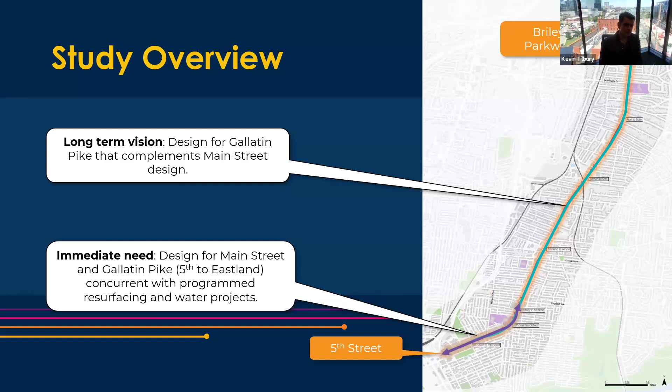On top of that, there's a long-term vision we're developing for the corridor, so that what gets designed on Main Street will be consistent for the entire corridor. So it's really two projects in one. The whole purpose is to set a long-term vision, so that projects done this year, next year, and in the year ahead are all consistent with this vision for what we call a complete street. That means intentionally providing safe and accessible options for all users, while being implemented in a cost-effective way, making good use of our resources. That's the vision we've set out to achieve.

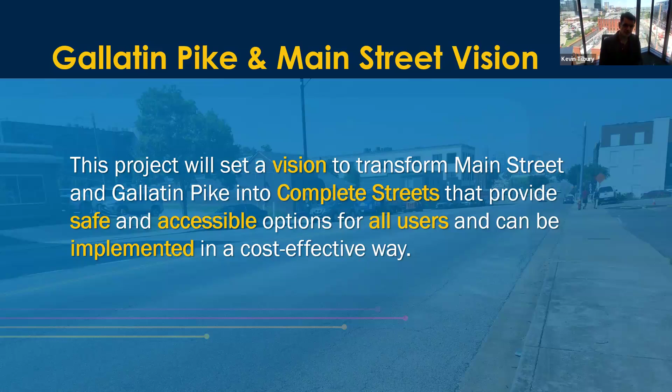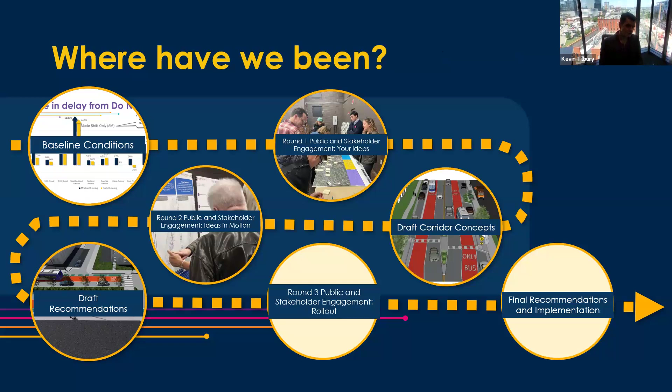We've been on a journey. Some of you have probably attended meetings in the past, and the good news is we're nearing the end. We've already had two rounds of public engagement and we're now in our third round. We'll talk more about that, and where we're going from here. Some of you are very familiar with the corridor since you've been here throughout the process; for others, this might be your first meeting. So we thought it would be helpful to bring everyone up to speed and remind you why we're doing this project.

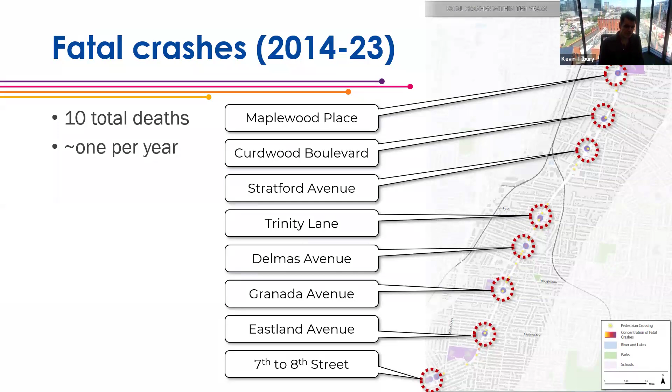Let's look at some of the data we've uncovered, which we shared at the first meeting. There is an existing and real safety need along the corridor. This shows the number of fatalities over the last 10 years through the end of 2023. What's remarkable is that since we created this map for our meetings in December, there have been two more fatalities on the corridor. So it's irrefutable that there's a safety condition here. We also have crash data, but picked this map because it really stands out.

Part of the reason we're seeing such a prevalent safety issue on the corridor is that there's not really a good place to cross the street. You can see on the map that there are stretches of Gallatin Pike and Main Street where you could go as much as half a mile before finding a safe, marked crossing opportunity. When you see a condition like that, of course you're going to have a safety issue.

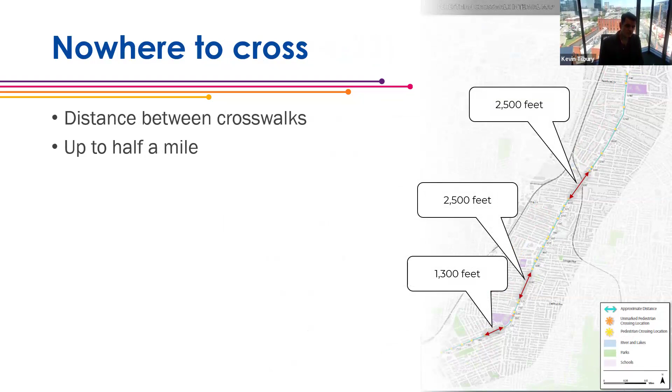There's an organization called Smart Growth America, and through their National Complete Streets Coalition, they compile safety statistics on places in America and rank them. The ranking just came out about two weeks ago, and Nashville lands 36 out of a little over 100 metropolitan areas in the United States. So we're not the worst, but we're also not the best—we're somewhere in the worst third for fatalities.

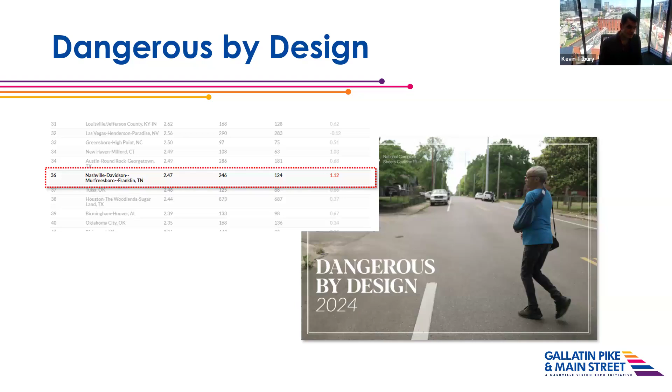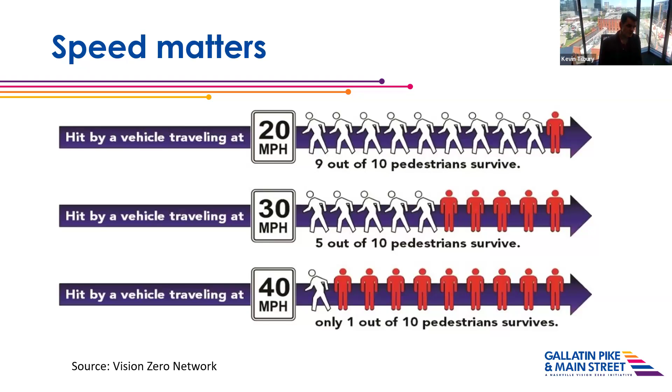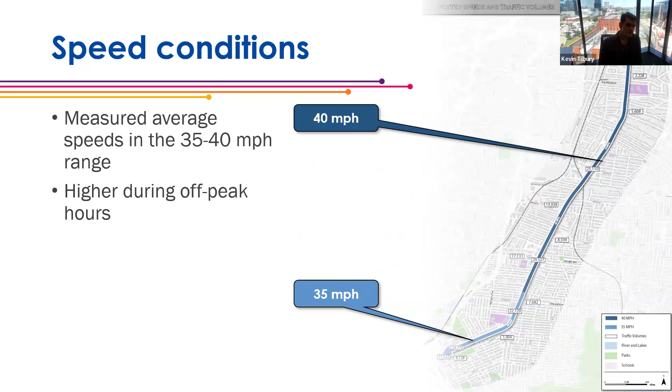This is part of an intentional effort to redesign our streets so they are safer for people. Another reason we're seeing this safety condition is speed. The magic number is 30 miles per hour—once cars travel above that, a collision with a pedestrian turns from an injury into a fatality. So we're designing the street so motor vehicles move at 30 miles an hour or less. That's in contrast to what we see on the corridor today, where measured speeds are 35, 40, and some off-peak speeds even higher, which is another major reason we see the safety condition we do.

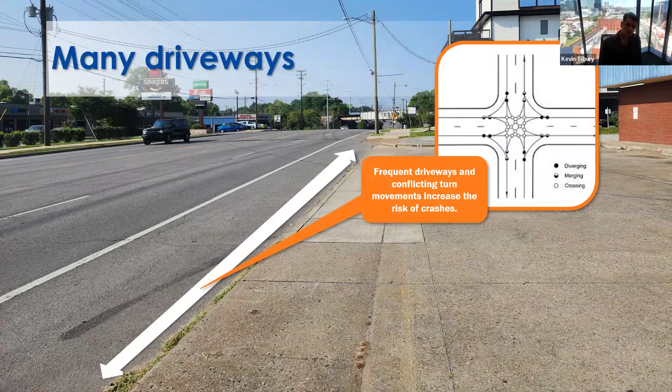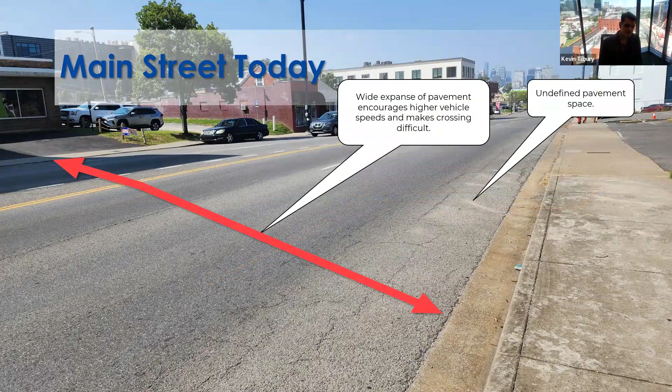There are a lot of driveways in the corridor, as you've probably noticed. That creates a lot of conflicts with turn movements and people coming in and out of places, affecting both the road and the sidewalk. Another reason for speeding is the design of the street itself—there's a big wide pavement with a lot of undefined space, and it's flat and straight. That's a prescription for speed, and it's precisely why we see cars speeding: it's due to the way the street is designed.

That has a net effect throughout the corridor, not just in terms of safety, but also the roadside environment. For those of you that have tried to walk on Gallatin Pike and Main Street, I suspect many of you have, it's not a comfortable place to be. There's not really a buffer between you and the high speeds zooming by. There's no furnishing zone for things like street lighting and planters, and there's no landscaping. So unless you have to walk on Gallatin Pike or Main Street, you probably wouldn't choose to, because it's not a comfortable place to be right now.

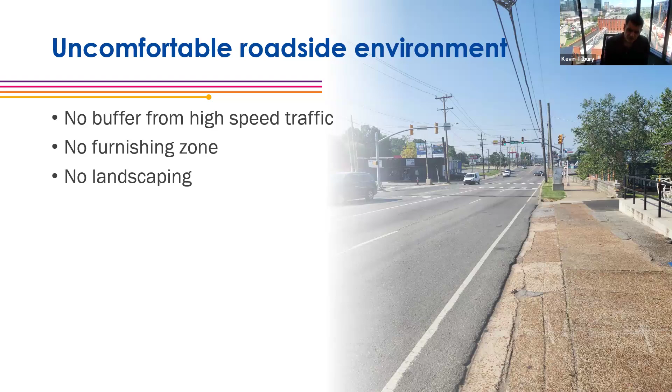So I'm going to show you an example. Make sure your sound is on so you can hear this.

This is what it's like to walk on Gallatin Pike or Main Street right now. It's hard to have a conversation because of the trucks.

So that's something that we're going to try and address.

At the same time, there's a lot of need in the corridor too. Gallatin Pike is actually the second most popular route, 56, in WeGo's entire system behind Murfreesboro Pike. It gives about 100,000 rides per month, and there's already good service in the corridor, about every 10 minutes. So the quality of service in terms of frequency is really already there.

But once you get on the bus, you're subject to a lot of delays just by the way traffic operates in the corridor. That results in a delay in your travel time if you're trying to ride the bus, but also increased operating costs for WeGo.

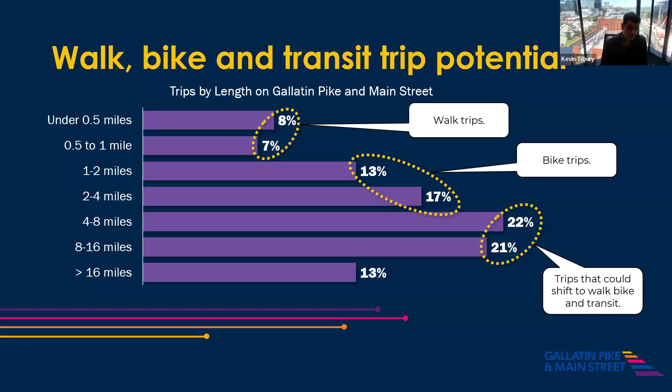And we're not just doing it for the sake of doing it because we like walking and biking and riding transit, although we do—there's also a business case to be made. The data shows that when you create places that are more accessible for everyone, not just cars but also people who walk, bike, and ride transit, you'll see a positive business impact as well. When you design really interesting multimodal environments, you see new investment in the corridor, but you also see existing businesses flourish. So there's a business case to be made for it.

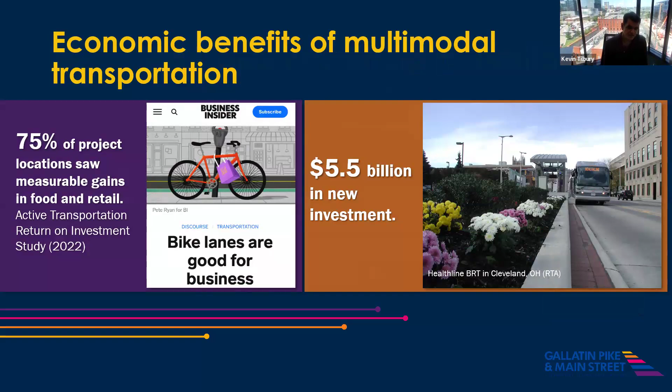So that's some of the background. I'm sure a lot of you joined us back in December when we had our first round of public workshops.

Some of the things we heard from folks—we gave them a blank piece of paper with Main Street and Gallatin Pike, and a bunch of street sections, and said, okay, you're the designer, build the ideal street you'd like to see on Gallatin Pike and Main Street. This is a composite of what people told us: they wanted to see more options. You see the bike lane, the transit facilities, in addition to facilities for cars, and landscaping.

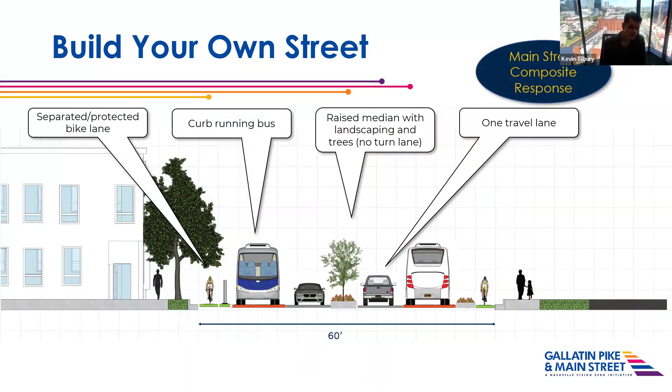So those are all sorts of things that people told us they wanted to see. We also asked people to tell us, what are your priorities for the corridor? What are the things that we need to focus on?

By far, the most important thing that people told us was safe and accessible crossing opportunities. And I think that goes directly back to the slide I showed you at the beginning of all the fatalities on the corridor. A lot of those are the direct result of crossing at an unmarked location because you have to.

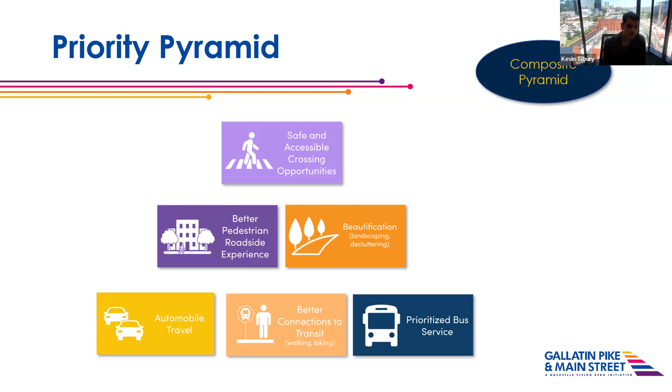We also heard about a better pedestrian roadside experience, which is also something we covered with you today. Landscaping, better connections to transit, prioritize bus service, but also making sure that we provide adequate automobile travel as well. So all the things that we see in the data, you guys are telling us as well.

Many of you may have participated in the survey called Imagine Nashville. This was done independent of our study, but what's interesting is they provided insights to individual neighborhoods. Our corridor is part of East Nashville, and when people were asked about priorities for their neighborhood, they said things like lack of public transportation, walkability, and bikeability. Those are all things they wanted to see in their neighborhood. So we're seeing it in other places too, not just in our study.

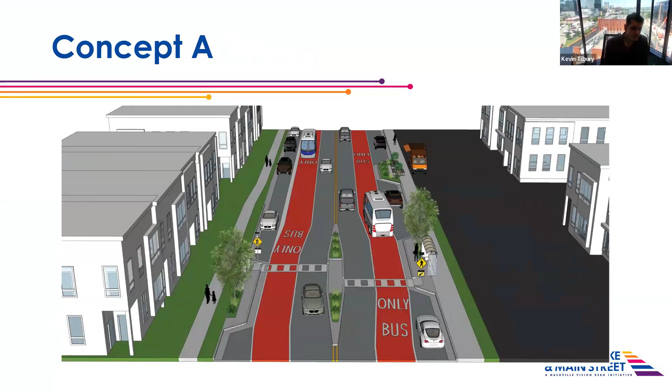Transitioning that outside lane to be for buses, but then also providing things like raised medians and bulb outs with marked crossings to get at that crossing issue we talked about, safe crossing opportunities, and also some really subtle design treatments to make sure cars move at appropriate speeds. You see the curvature in the road—those are things that contribute to those lower speeds.

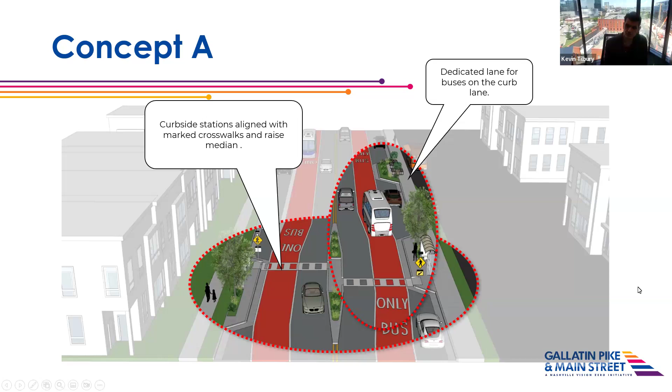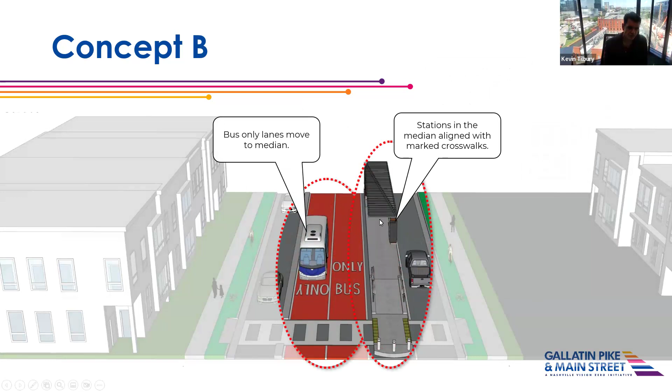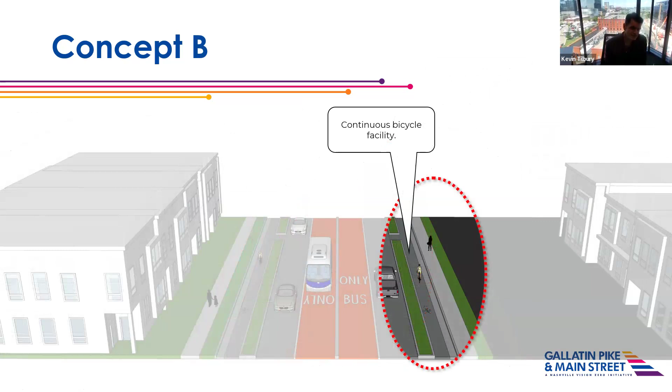We looked at a second concept that's similar, but one of the main differences is we would convert the two inside lanes to bus lanes. With this, you also get a raised boarding platform in the middle that can serve not only for boarding transit, but also for crossing in the middle of the street. The other notable thing about this design is both provide bike facilities in certain stretches, but this second one provides a continuous bike facility from north to south. That's the major difference between the two.

So we took these ideas and brought them out to you back in March, about two or three months ago, and asked, what do you think? We've got these two concepts—does this work for Gallatin Pike and Main Street? We didn't ask you to pick one or the other, but said tell us what you like and don't like about each one.

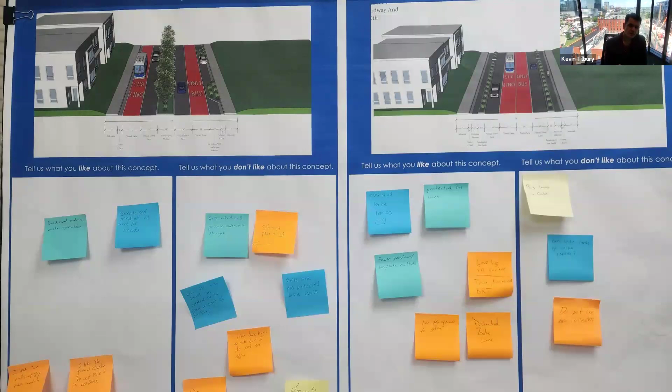If you were at a public workshop, you probably saw one of these boards. We had something similar online, showing a section of the corridor for both concepts and asking what do you like and what you don't like. Here's what we heard. There are a couple of things that resonated throughout the entire process, no matter what venue we were at.

One was landscaping—when we showed a picture that included landscaping, like the image here on the slide, everyone consistently said yes, that's awesome, we need more of that, we like the landscaping. They also said yes, we need bike facilities on Gallatin Pike and Main Street, that's a critical need. And they also said the transit lanes are pretty cool, we like that too. So those are the three things people resoundingly said they liked.

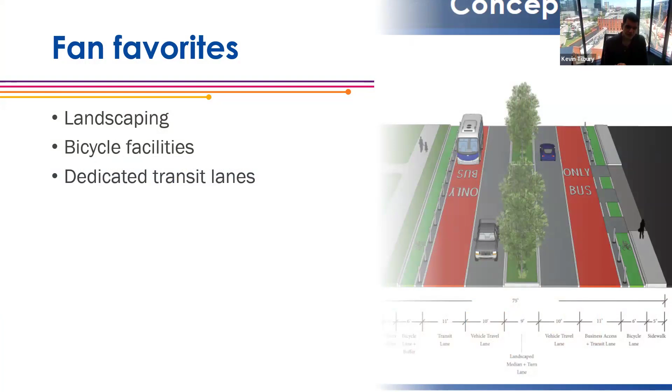But then they also had some concerns too.

One of the concerns is, you'll notice on the image we're showing the bike lane and the delineators, but they're not protected. We heard a lot of feedback that the bike lanes are great, but there are some stretches of Gallatin Pike that people don't feel safe biking on unless they're protected. So we need more than just delineators for protection.

We also heard some concerns about the traffic impact. When we put in a bus lane, we trade it out for a general purpose lane, and there were concerns about what this would do to traffic. There were also concerns about the center boarding platform, the fact that you had to enter in the middle of the street to board the bus, which goes directly back to concerns about crossing the street.

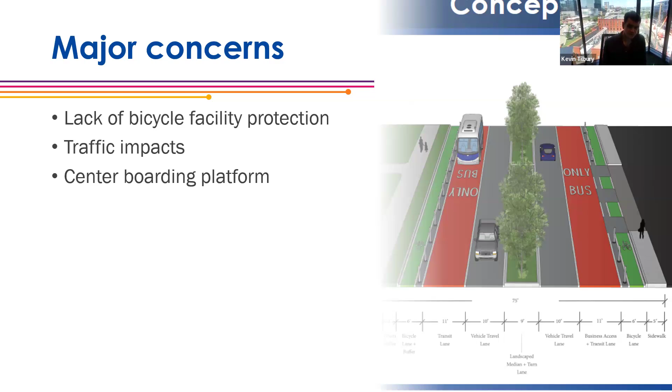We also asked you, since we've got limited pavement, we can't do everything, we've got to make it all fit within the pavement that's there today. So we wanted to get a sense of what elements are critical to you, what are must-haves, and what are things that might be important but you're willing to lose in order to get something else.

Those are the must-haves. What you said was not as important, and we know not everyone has this opinion, but folks at the meeting said on-street parking was not as important as other things. Then there were ones that were all over the map, where some said yes this is really important and others said no, like direct left turns at mid-block locations, and providing raised medians and bulb-outs. Those fell somewhere in the middle.

All right, we're going to get to your questions in just a minute, but we want to show you how we've taken that feedback and come up with recommendations. So let's go ahead and dive in and show you the recommendations.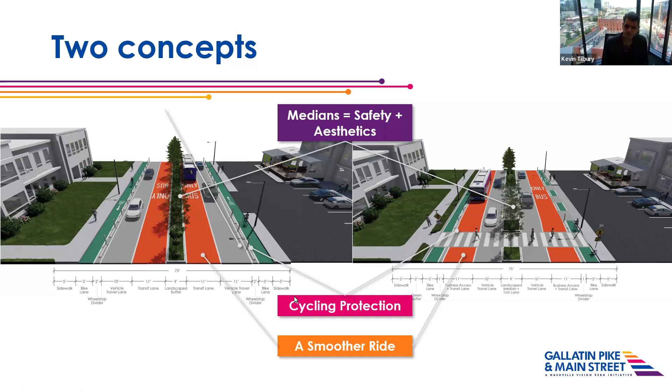One of the advantages of curbside, as you can see here, is that when you take the bus lane and the bike lane into account, it provides 18 feet of separation between the sidewalk and the road. So if you recall the video I showed you, with loud traffic zooming past if you're walking down the street, this creates a fundamentally different experience because now you're creating that separation between traffic and the roadside.

It's going to create a fundamentally different roadside experience if you're walking, but also if you own a business there. The other thing it does is the bus lane provides a buffer between the bike lane and traffic too, so it's going to provide a more comfortable cycling experience.

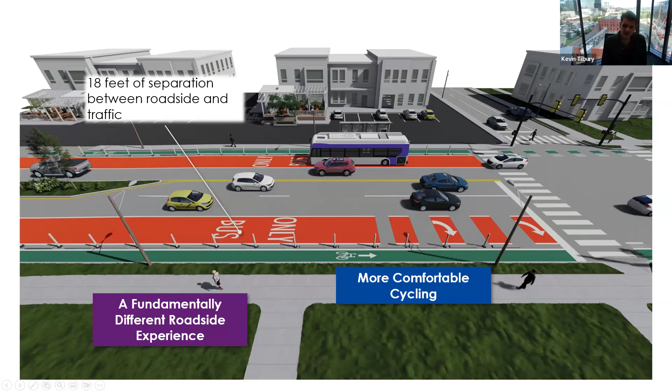We talked about the raised median, and it provides a really important safety benefit for street crossing. Because we've heard so much about how bad it is to cross the street, we wanted to spend a little bit of time talking about that.

This is what that raised median does, combined with the design. With this design, you really only have to be exposed to general traffic for about 10 feet at a time for just this lane. If you contrast that with what it's like today, it's a fundamentally different experience.

This is what it's like to cross Gallatin Pike right now, the image on the right. You've got to cross 50 feet of traffic and wait for a long enough break in both directions to be able to dart across. Most of the accidents or safety issues we see are in situations like this.

But when you introduce the transit lane and the raised median, it creates a different experience. You cross 10 feet in one direction, stop in the median, and then cross 10 feet again. It's a much more comfortable and safe experience. That's the number one thing we heard from people — they want a better crossing experience, and this achieves that.

One of the things you'll probably notice about medians is that it provides a safety benefit, but it also restricts access. So we did want to touch on how access would be provided.

This is the concept where the bus lanes run on the outside. If we were to build raised medians, they wouldn't be everywhere — they'd be in strategic locations, which means in some locations you might not be able to make a left turn, but in others you would be able to do a little bit of both.

In this case too, cars would make right turns from the bus lane as well. So it's a bus lane, but it's also a business access lane for cars.

That second concept, concept B, has transit running in the middle, so you're not going to be able to make left turns across the bus lane. You won't be able to make mid-block turns into driveways or minor streets. But when you get to a signalized intersection, there would be a dedicated phase for you to make a left turn and a U-turn so that you could turn and go into a driveway.

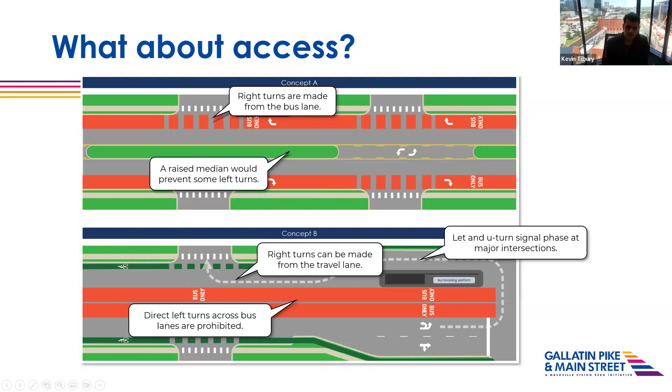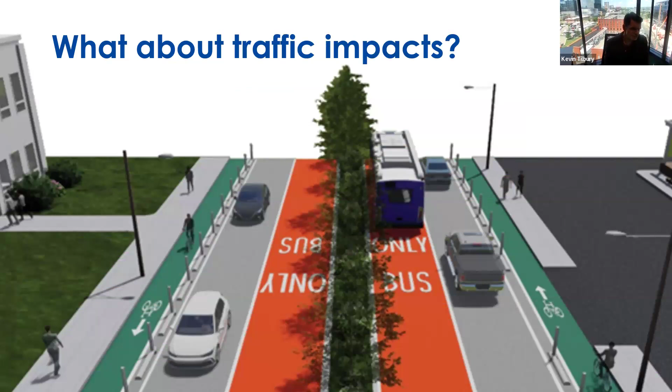Another question you may have, and it's probably in the Q&A, is that we're repurposing one of the general travel lanes for buses, so you're probably wondering about the traffic impacts. We've looked at intersections and know there are some specific locations of congestion that would need improvements, but we also wanted to talk about the mainline capacity issue too.

You guys must have a different lifestyle than I do. I'll be in bed by then.

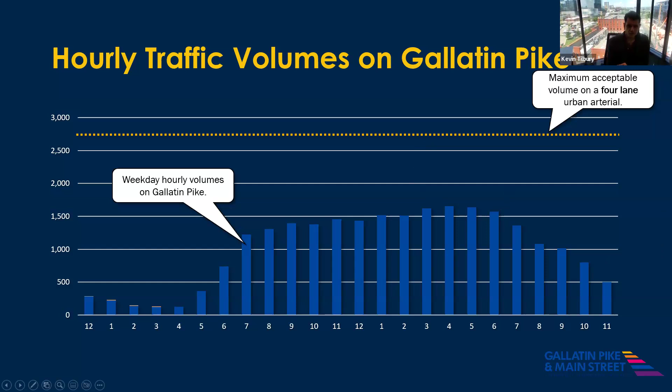So what happens if we take away a lane of traffic? This is the effective capacity now. It goes from about 2,700 to just under 1,500 cars per hour. This is the capacity for a 2-lane urban arterial. So you can see that in those afternoon hours, the traffic volumes creep above that capacity.

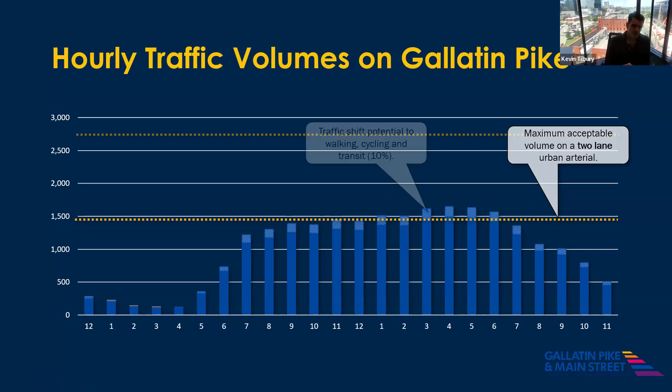So that's when you might see congestion and it might start to become an issue. But remember, we talked about the potential for people to start walking and biking. We put that at about 15 to 20% of the trips right now that are a mile or less in length. Some of those could shift to walking and biking. So let's say half of them do, about 10% shift to walking and cycling. So you can see then the daily volumes would go down.

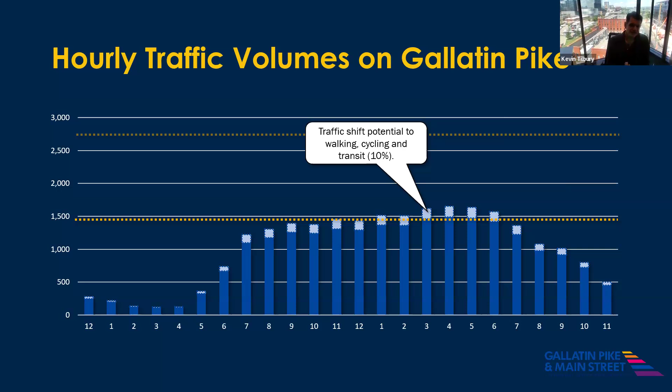And then also Ellington Parkway - we've looked at trip origins and destinations, and we think about 15 to 20% of trips that are on Gallatin Pike and Main Street right now could just as easily complete their trip on Ellington Parkway. Let's be conservative and say about 10% of those shift. So if 10% shift to other modes and 10% go onto Ellington Parkway, well then we're good, we're below the capacity, so we're in a good position. We feel pretty good about the traffic impacts on Gallatin Pike and Main Street as a result of the design improvements.

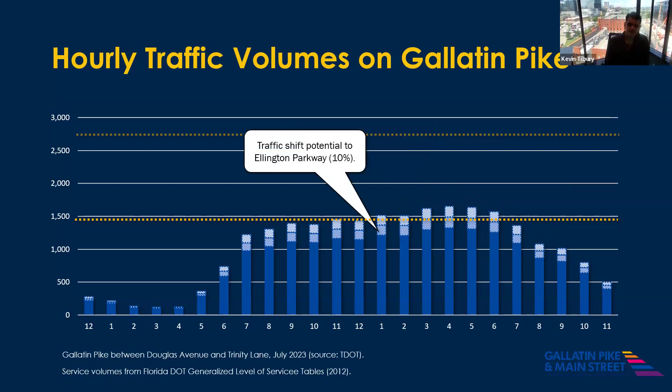And I think the other thing we want to point out is that a big part of this is creating safe spaces for walking, for riding a bike, for accessing transit. But the bigger picture is that we're making Gallatin Pike and Main Street a place. That includes people who live on Gallatin Pike and Main Street, but also people who own businesses. We want this to be a very successful, thriving street that people want to come to.

So this is what we see as kind of a sneak peek for the long-term vision of the corridor. This is a business that's opened recently, Tiger Bar, which coincidentally just made one of the top 50 bars in America list. So it's already gained some popularity. But look at what they decided to do.

This is the front-loaded parking we talked about. Here's the driveway, and this was parking at one point. But this business in particular said, for us it's more important to provide space for people because that's how our business operates. So we're going to repurpose the parking lot and provide outdoor seating for folks. The goal is, if we can change this roadside environment and make it more habitable and more comfortable for people, more businesses will choose to do this, and it's going to create more of a place for people to be instead of traveling through.

So that's the long-term vision. I want to leave you with that.

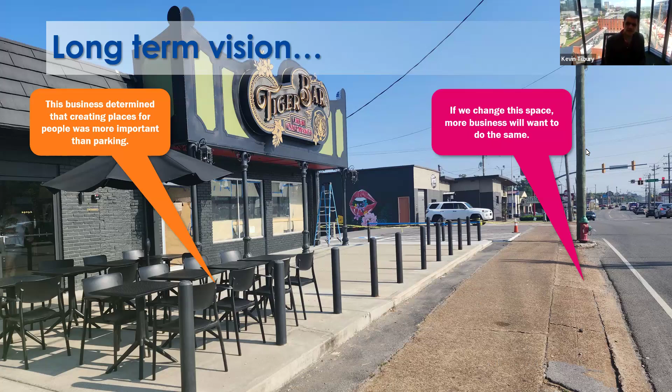We've just scratched the surface of the plan. We know that you probably want to look at it in more detail and have more questions. You can go online and we can send you a link to where you can find this information online. But we're also going to go out and have an opportunity for you guys to have a conversation with us about it and get some of your more detailed questions answered. And we've got 3 opportunities for you to do that.

We're going to be at WeGo Central 2 different times. This afternoon from 2:30 to 4:30, and then again on Wednesday morning from 7 to 9 a.m.

We're going to be at the East Park Community Center in East Nashville on Thursday evening from 5 to 7. These are drop-ins, so you don't have to get there at 5. If you get off work at 6, come by then. There's no official start and stop. We'll be there with more information, and you can have a conversation with us.

The third location is the Inglewood Public Library at the north end of the corridor, and we're going to be there tomorrow at 2 different times: during lunchtime from 11:45 to 1:45, and then again tomorrow evening from 5:30 to 7:30. So that's 5 different opportunities for you to come out and visit and see us. There's also a QR code you can scan to look at this information online as well.

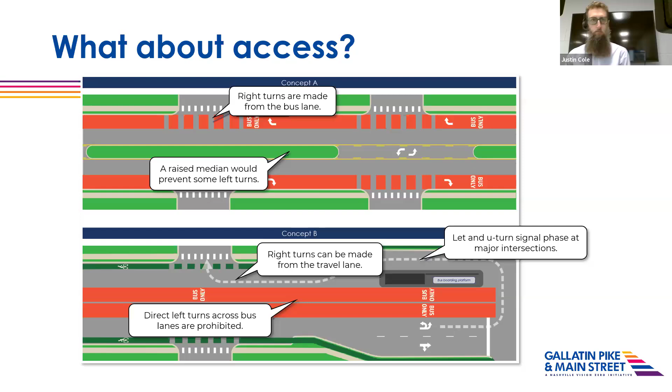All right, moving to bike facilities - can you speak to the continuity of bike lanes in the two concepts, center running versus curb running, and whether the bike lane is in the middle versus on the sides?

So for concept B, the one where buses operate in the center, there would be provisions for a dedicated bike facility for the entire length. Generally speaking, north of CSX, there's enough pavement width there to have that. Remember the image we showed of the bike protection? There is enough right of way there to make that happen.

To have that protection, once you get south of CSX, the curb narrows and the pavement isn't quite as wide. So we can provide a bike lane there, it just wouldn't be protected. Which is not ideal, but we're kind of working within the limited amount of pavement. Then once you get a little bit south into Main Street, we've got a design for a protected bikeway within there.

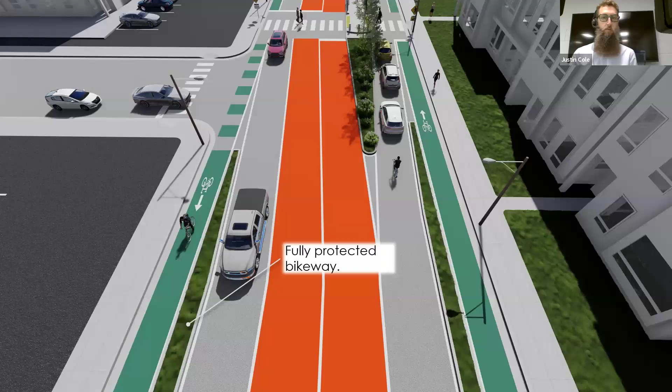I was just going to say, while you're bringing that up, one of the things, because of that middle segment needing to be an unprotected bike lane, we've looked at alternative neighborhood routes, knowing that not all riders would be comfortable with that. So how can we provide a parallel route through the neighborhoods?

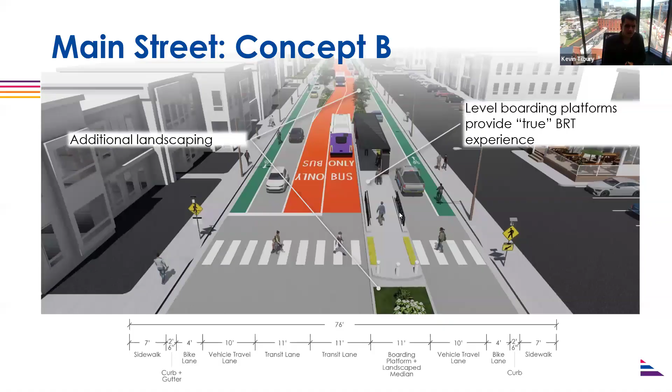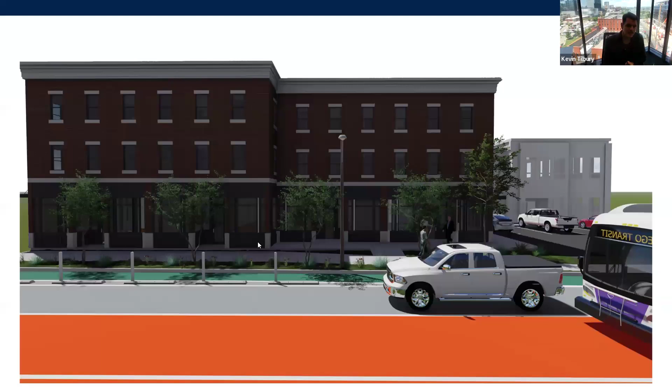So that's what we're showing here, this protected bikeway. And this is south of CSX to Eastland that I was referring to, where we've only got 50 feet of pavement. There's not enough right of way to put protection in, but we can get a bike lane. And then once you get north of CSX, you see that bike lane protection there.

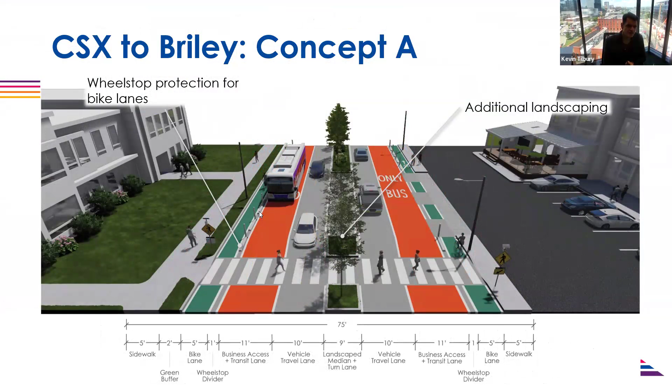The wheel stop, and that's true. The protection is true both north of CSX, both are protected bike lanes, whether it's curb running or center running. There's enough pavement width to do that.

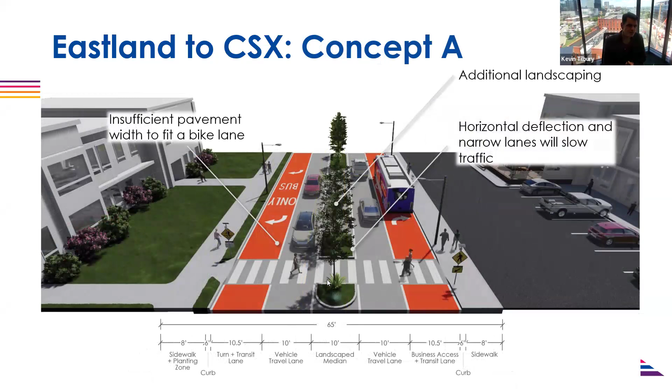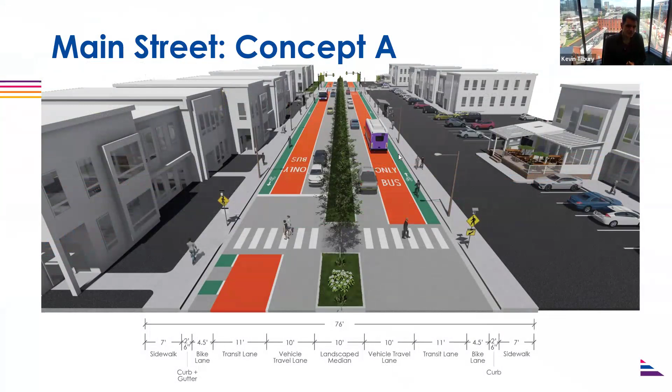Then once we get south of CSX to Eastland, there's just not enough pavement width to provide a bike lane within this section, but there is for concept B. And then once you get to Main Street, both have bike lanes. The curb running is not protected, but the bus lane does buffer between the bike lane and the road. The center running does have that protection.

Let's see if I can find that map. Here we go, so this is the map that Justin was referring to. We've mapped out a series of neighborways, low speed, low volume streets that are comfortable to cycle on. It would tie into the Spokes project many of you are familiar with, the bikeway project on Woodland. This is a much more comfortable ride, but it's also a little circuitous and out of the way, so it's not as ideal if you want a direct route.

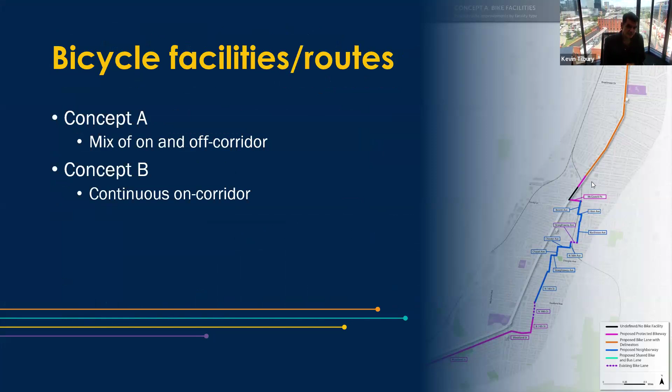Okay, I hope that answered the question.

Speaking of parallel routes, especially for bike facilities, are there any plans to redesign surrounding streets like Woodland, or those in between Main and Woodland?

Yeah, so that's the East Nashville Spokes project, which you can go onto our website and see more information on. That is getting ready to move into design later this year. It is a plan to redesign Woodland Street, South 10th, South 5th, with new bike facilities, pedestrian improvements, landscaping. So that's one big one. We've also got other neighborhood bikeway projects you can learn about from our bikeways tracker online, and also our sidewalks tracker. So there's other ways you can learn about some of the other projects we have going on.

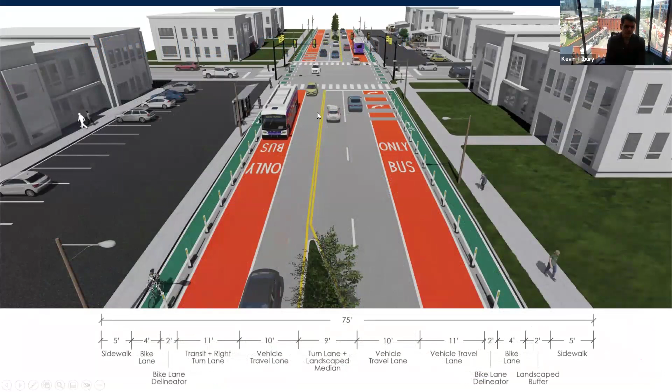For curb running, because of the amount of right of way available there, it will be more like the standard WeGo shelter, simply because there's not a lot of right of way on the side of the road. There'll be a shelter, but it won't be significantly different than what you see today, at least not in the near term. Those would probably look similar to some of the bus stops on Nolensville Pike, where the bike lane raises up at the bus stop and you have a shelter on the sidewalk. In the future, those could be upgraded to larger stations, but that requires additional right of way.